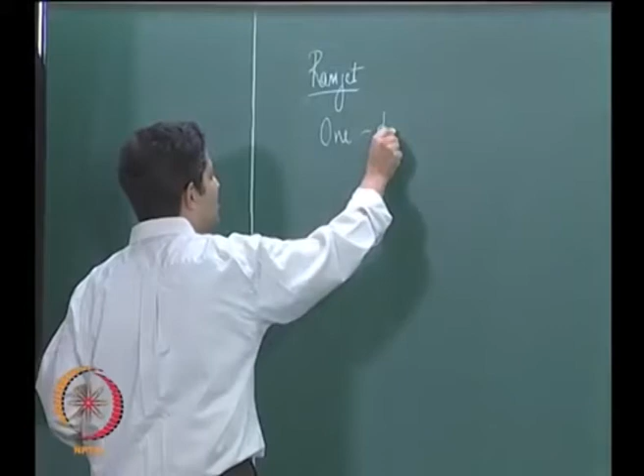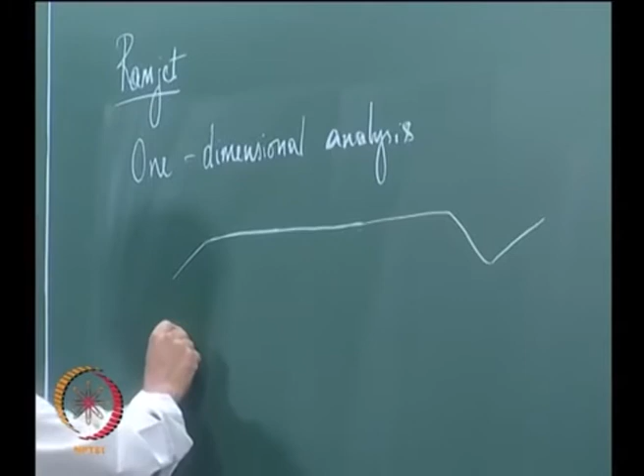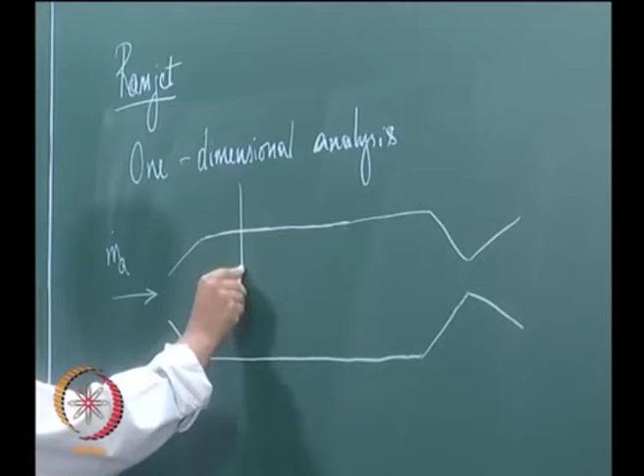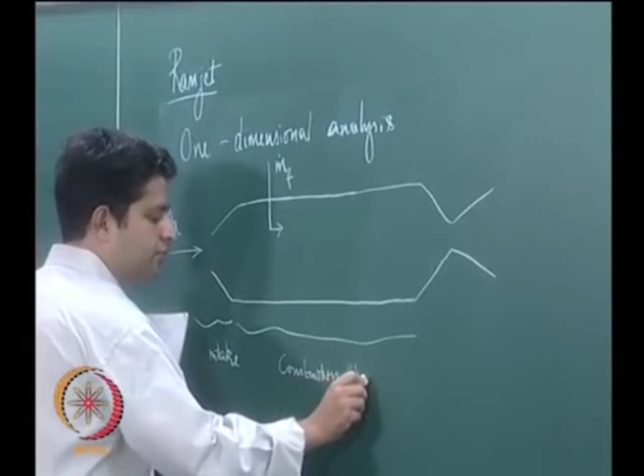That is, the variation is only along the axis of the ramjet. So just to refresh, we have an intake for the ramjet. This is a schematic of a ramjet. You have air coming in from the left, and you have fuel added. This portion is the intake, this is the combustion chamber, and this is the CD nozzle.

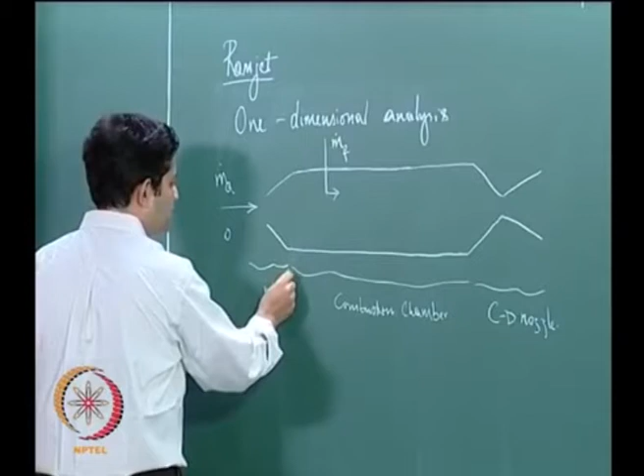Now let me indicate points here. I will call this 0, I will call this 2, 3 and 4. Now correspondingly I will put this information on a TS diagram as to what happens to the cycle on a TS diagram. Let us look at it.

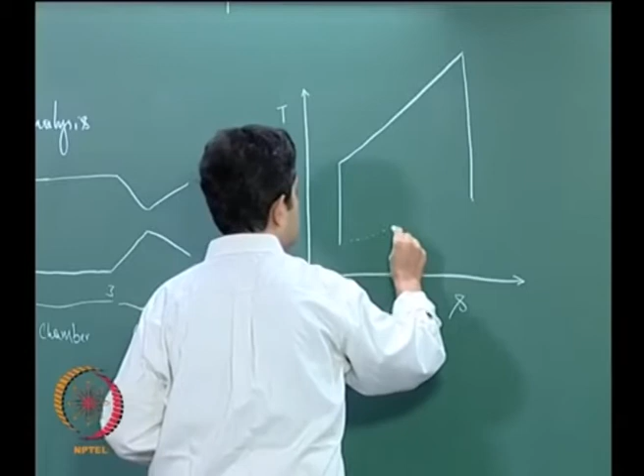This is 0, 0 to 2 is compression, isentropic compression. We are assuming ideal processes here. 0 to 2 is isentropic compression, 2 to 3 is heat addition in the combustion chamber here, and 3 to 4 is expansion through the nozzle. Okay, fine.

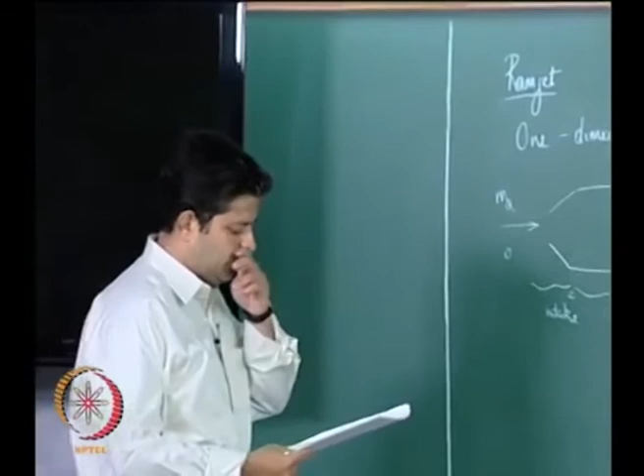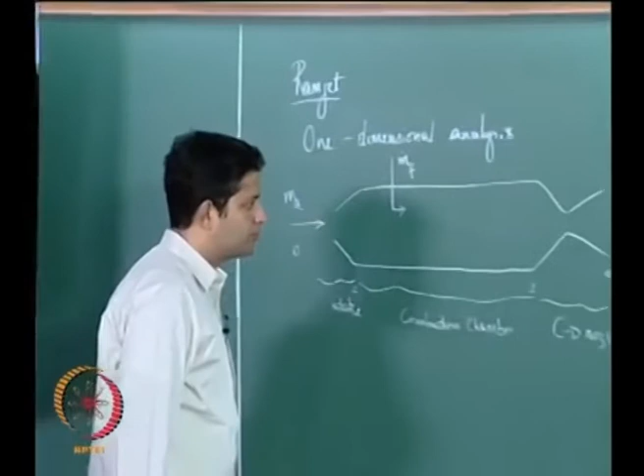Now we had derived some time earlier the thrust equation, and we had seen that for an air breathing system the thrust F is equal to m dot A into, I will call it in terms of the quantity here, V naught, and m dot A into 1 plus f, V4 that is the exit velocity, minus V naught plus the pressure thrust A4 into P4 minus P naught. So this is the exit velocity, this is the entry velocity, and this is the pressure thrust. Typically the pressure thrust part is very small compared to the convective flux thrust.

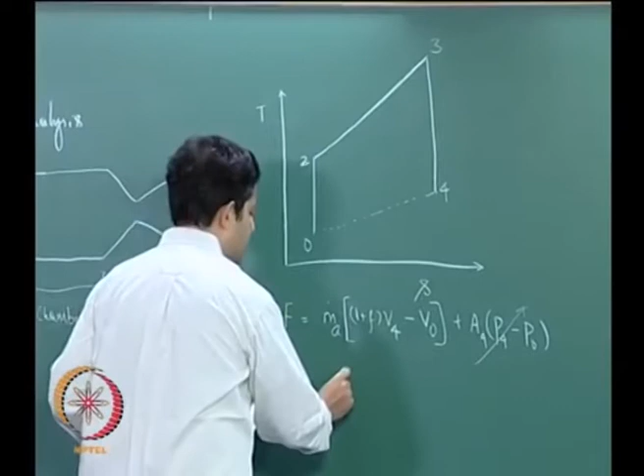So in this analysis we will neglect this part. We will consider that the nozzle is optimal, the flow in the nozzle is optimally expanded. So P4 will be equal to P naught, so this part goes to 0, and essentially we are left with only the convective flux.

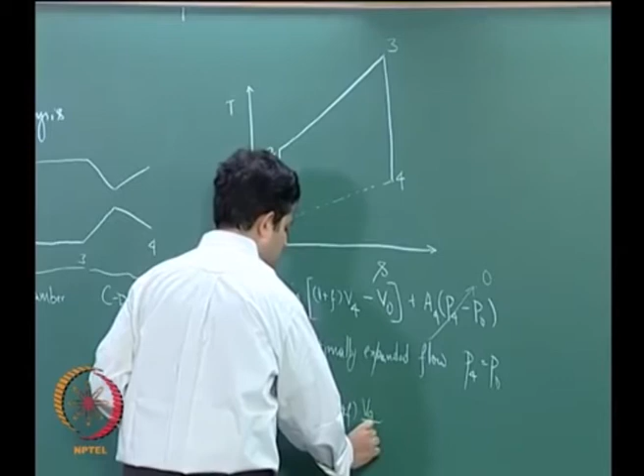Now, I can rewrite this as F is equal to m dot A V naught, okay fine.

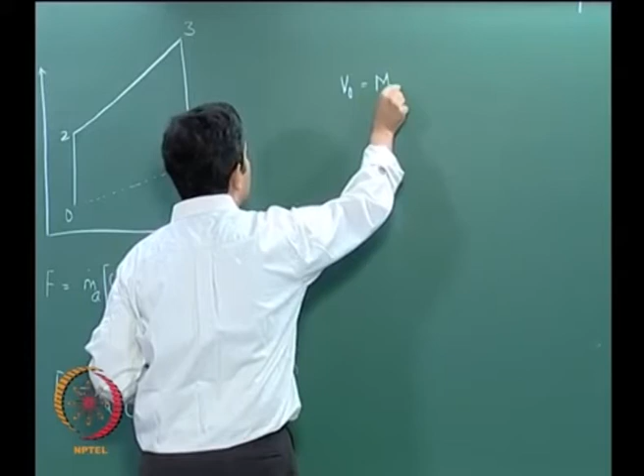Now further I want to simplify it. What we know is that velocities are related to Mach number and speed of sound, so I will use that information. I know V naught is equal to M naught A naught, and V4 is equal to M4 into A4. I also know that A naught is nothing but... and A4 is... okay.

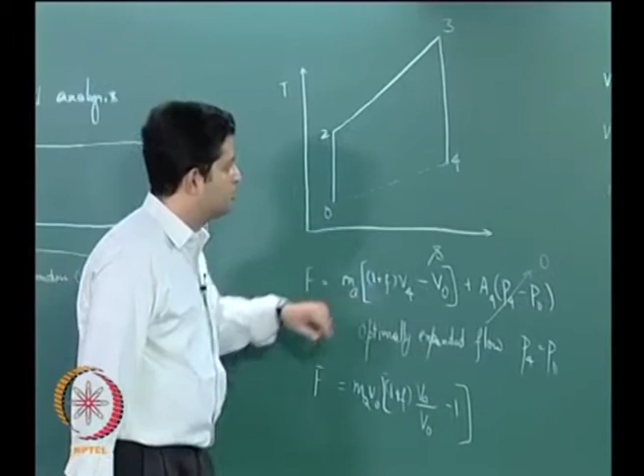So I know the relationship between the velocity in terms of Mach number and then in terms of temperature. Now we will make an assumption here. If you see here, A4 corresponds to the velocity of sound at condition 4. At condition 4, you realize that we have added fuel and burned the fuel, and therefore the composition of the gases at 4 and 0 are not the same. So typically speaking, I should have written different notations for these two, right. But in this analysis, we will assume that as the gases pass through the device, there is no change to either gamma or R.

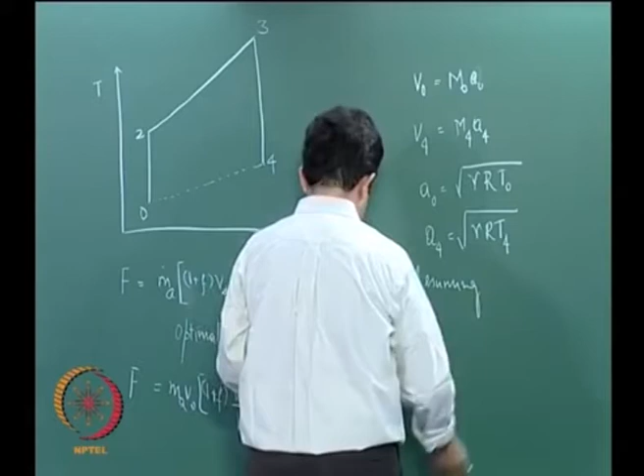So assuming R and gamma to be the same for exhaust gases and ambient air, we can do the further simplification of this.

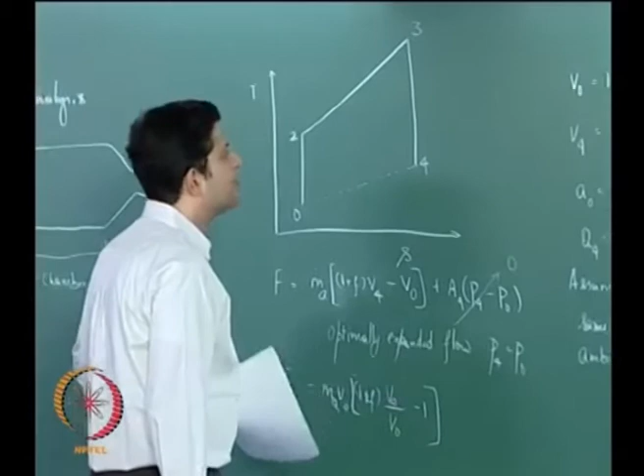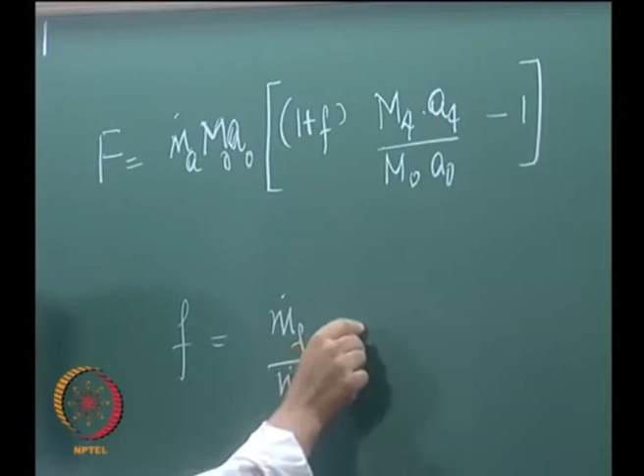So I can now write F is equal to m dot A. I know that V naught is nothing but M naught A naught, and M4. Now if you remember our discussions earlier in the course, in all the air breathing propulsion we said that if kerosene is the fuel or any hydrocarbon is the fuel, then f, the fuel air ratio, that is m dot F by m dot A for stoichiometry is around 1/16-17. So this is pretty much less than 1, so we can neglect f in comparison to 1. So f is very much less than 1. So I can rewrite my equation as F is equal to m dot A, M naught A naught, so this goes to 0. I will get M4 into here. I know that A4 is gamma RT4 and A naught is gamma RT naught.

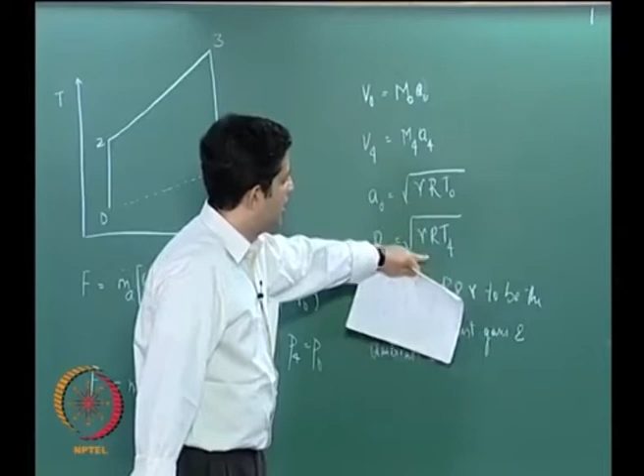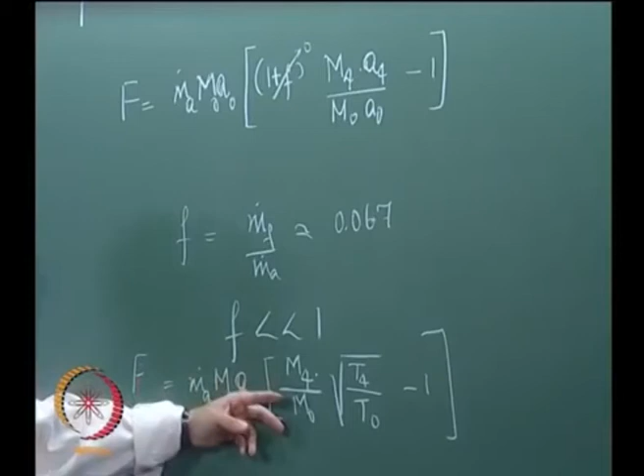What I will do is take out the gamma R part because of this assumption, and I will be left with M4 by M naught into under root of the temperature ratio. So we have been able to express this in terms of ratio of exit to inlet conditions. Now what we will do is what is known as cascading of pressures and temperatures. We will try to cascade from the nozzle side towards the inlet and see what we can get out of this.

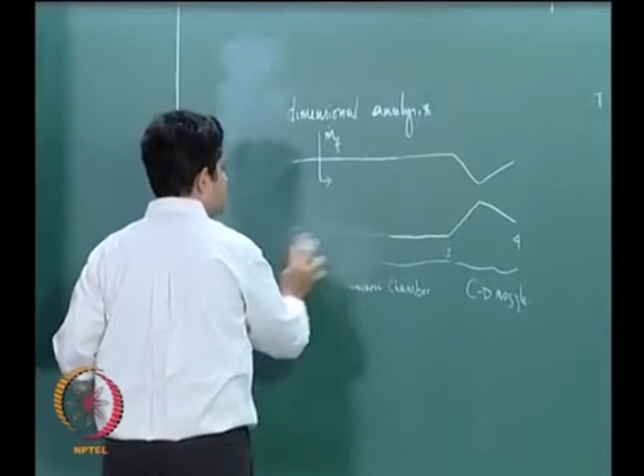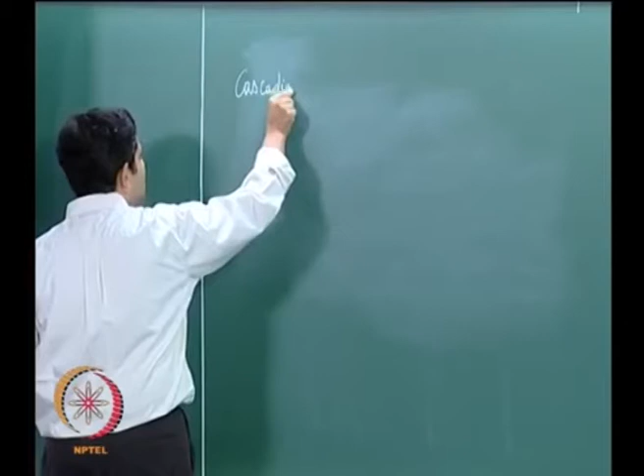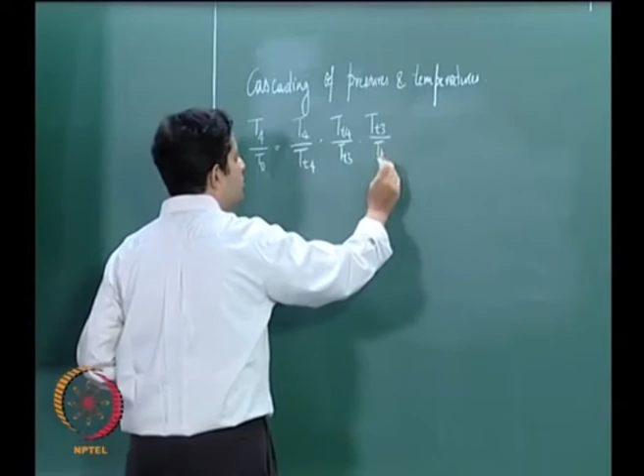We will do cascading of pressures and temperatures and see what we can get out of it. Firstly, let me take T4 by T naught. T4 by T naught, I can write it as T4 by TT4 into TT4 by TT3 into TT3 by TT2 into TT2 by T naught, or I will call this TT naught to TT naught by T naught.

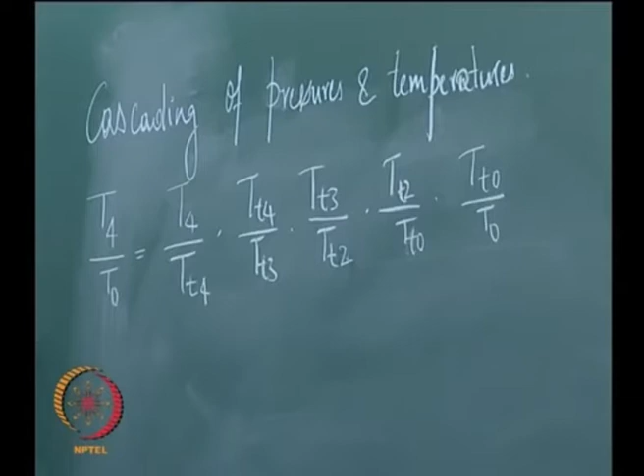The subscript T here indicates total or stagnation conditions. So, what we have done is we have expressed it as a ratio of static to stagnation, and then stagnation of 4 to 3, 3 to 2, 2 to 0, and then stagnation to static. All these will cancel out and you will get T4 by T naught.

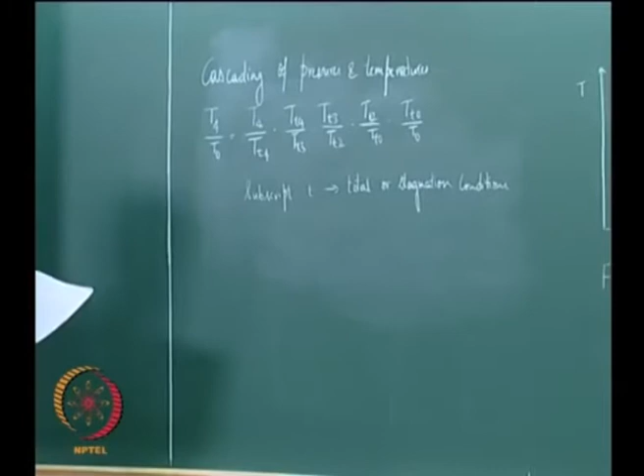So, let us look at what are these values. This is nothing but local static to stagnation condition, which we can express in terms of Mach number.

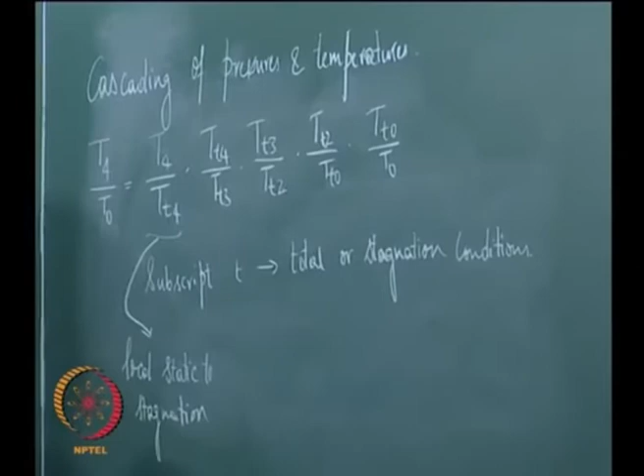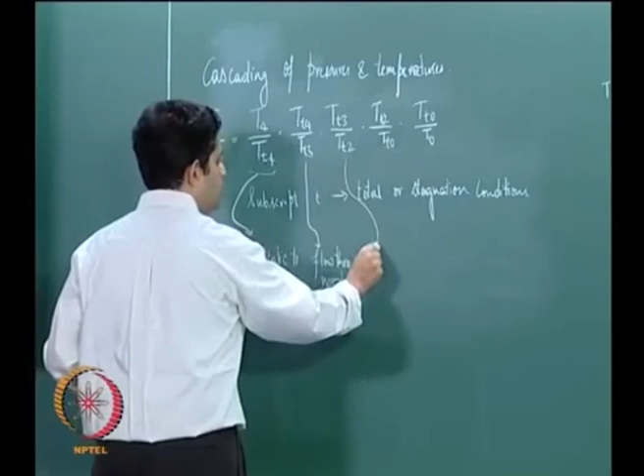What does this represent? Tt4 by Tt3, it represents flow through the nozzle. Similarly, Tt3 by Tt2 represents flow through the combustor. This represents flow through the diffuser or intake, and this again is local static to stagnation.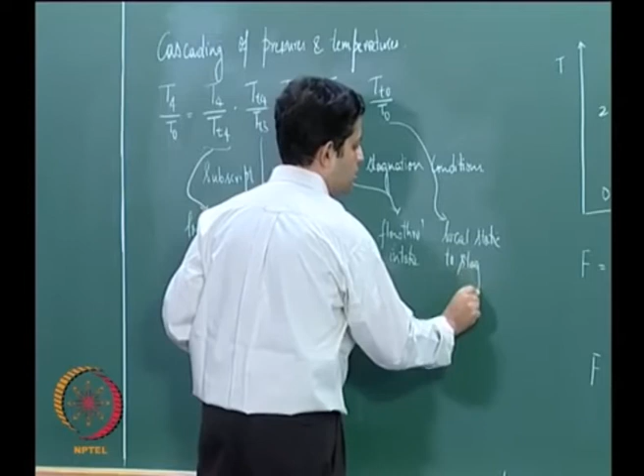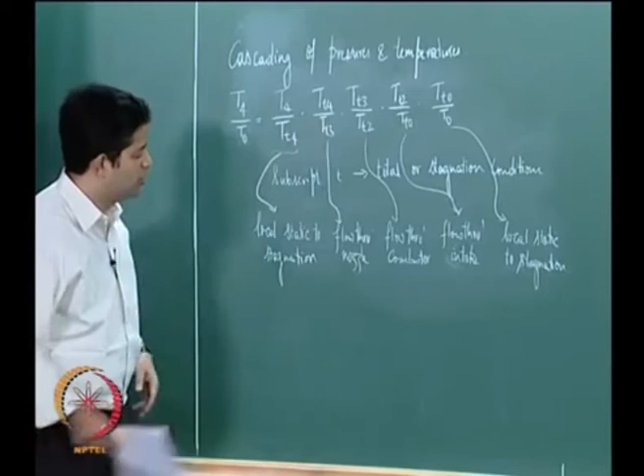Now, for an isentropic flow, what happens to this ratio Tt4 by Tt3? If we assume the flow through the nozzle to be isentropic, then both these temperatures are same, so you get this ratio to be 1. Then again flow through intake, this is also 1.

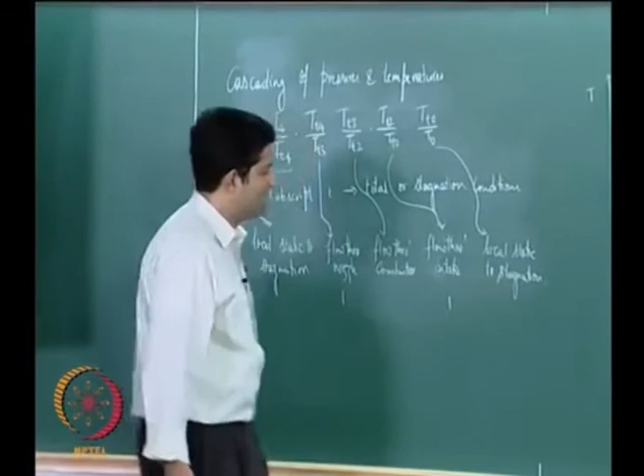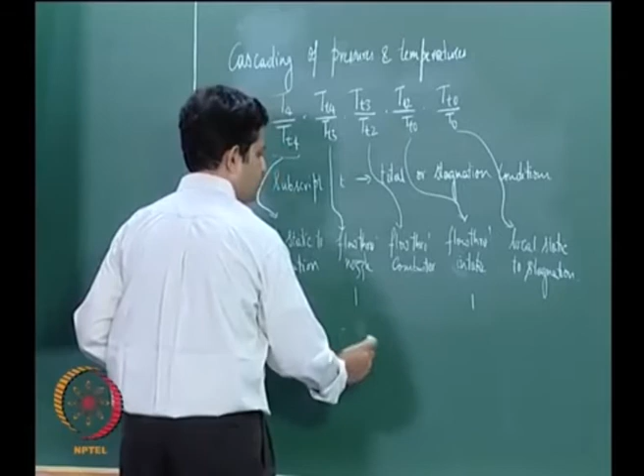You are left with now 3 things: flow through combustor and local static to stagnation. The first and the last one we can express in terms of Mach number. This would be 1 by 1 plus gamma minus 1 by 2 m4 square into 1, and again this would be one plus gamma minus 1 by 2 m naught square. So, lastly we are left with flow through the combustor.

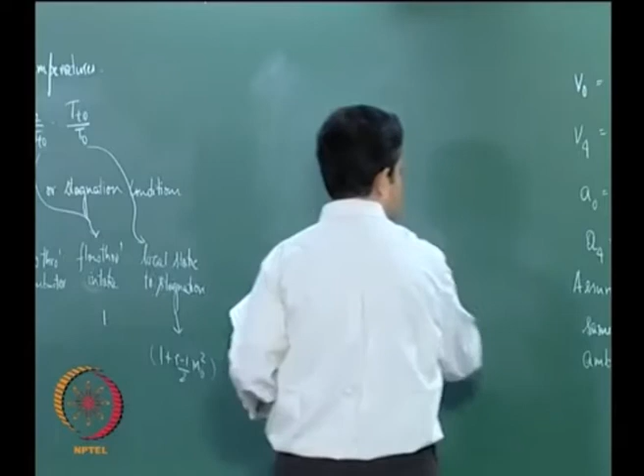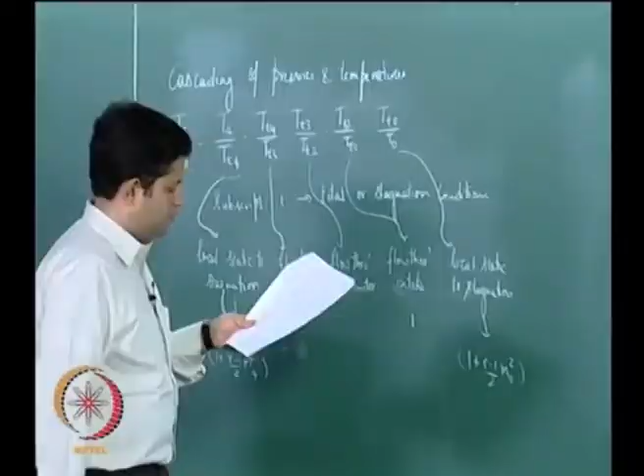Now, let me call this ratio Tt3 by Tt2 as tau b. Now, I can also express this tau b as Tt3 by T naught into T naught by Tt2, fine, T naught cancels out, you get the same thing.

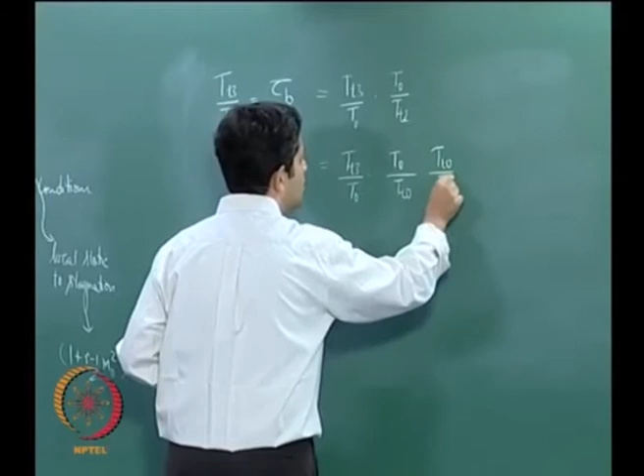This we can express in terms of Mach number, and let me call Tt naught by T naught as theta naught. So, if I call Tt naught by T naught as theta naught, I will get tau b as equal to Tt3 by T naught into 1 by theta naught.

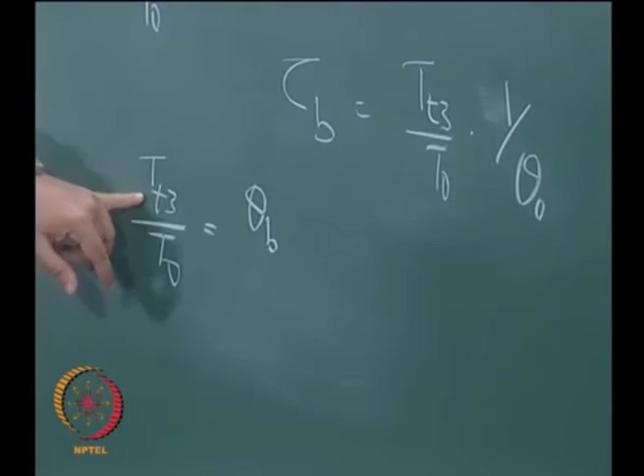I will also define Tt3 by T naught as theta b. This is nothing but the ratio of the exit temperature of the combustor to the ambient temperature. Now, this is under the designer's control, right, so therefore this is a very important parameter, as we will see later on in the discussions. Tt3 is the temperature at the exit of the combustor and T naught is the inlet temperature, so we will call this theta b.

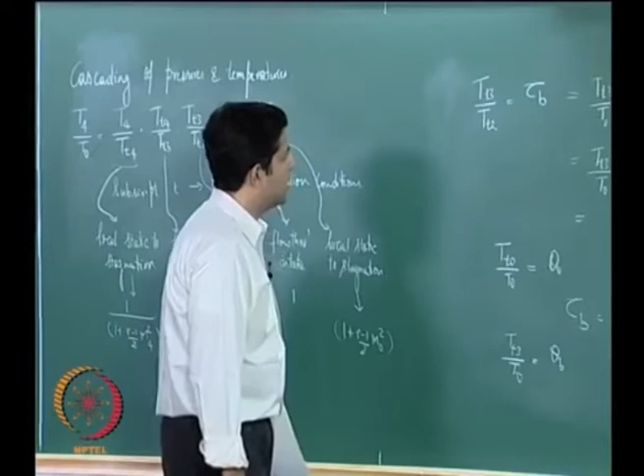So I get tau b as this, which is nothing but theta b by theta naught. So, if I substitute back for this T4 by T naught, all this, I will get the following expression.

Let me put that as 1 by 1 plus gamma minus 1 by 2 m4 square into 1, into, if you see here Tt3 by Tt2 is nothing but tau b, which is nothing but theta b by theta naught, into flow through intake, which is 1, into the last part 1 plus gamma minus 1 by 2 m naught square. I have defined this ratio as theta naught here. So, finally, we get T4 by T naught is equal to theta b by 1 plus gamma minus 1 by 2 m4 square.

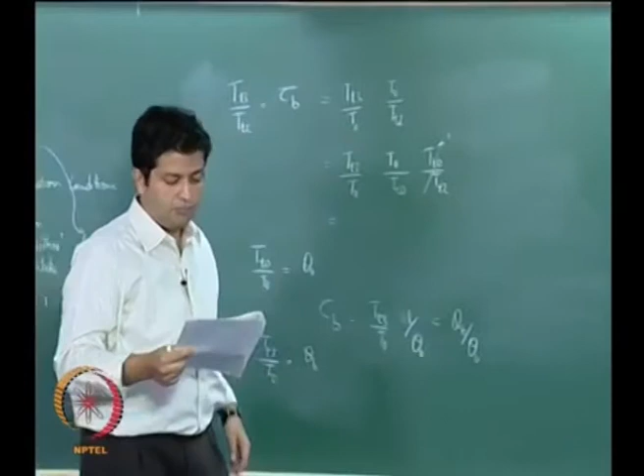Now, we have been able to derive this expression for T4 by T naught by cascading temperatures. Let us now do the same exercise by cascading pressures, to try and find out what is the relationship for Mach numbers.

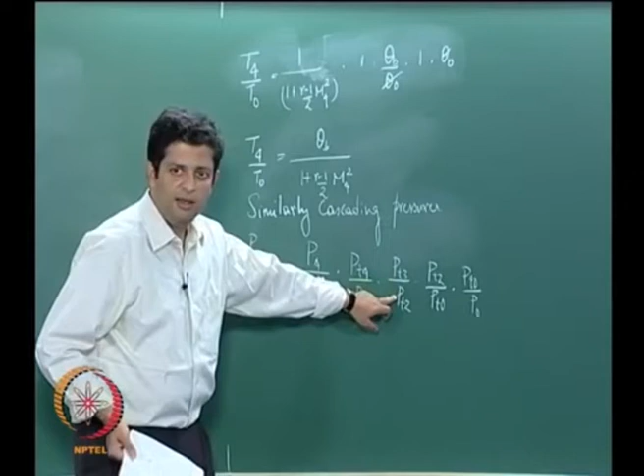This pressure term indicates the efficiency across the nozzle. This indicates the efficiency across the combustor, and this indicates the efficiency across the intake. So I will call these nozzle efficiency eta n, burner efficiency eta B, and lastly diffuser efficiency eta D.

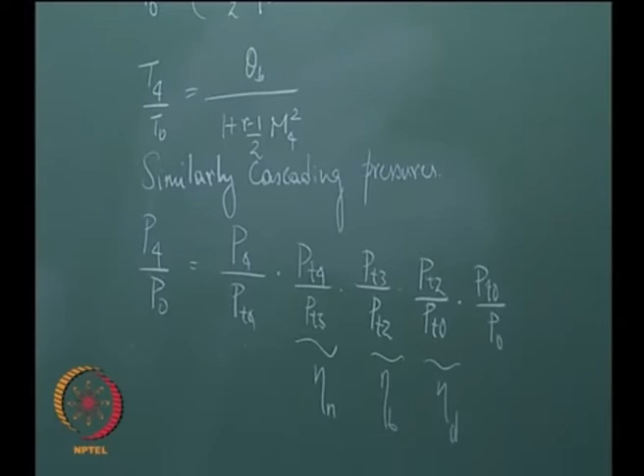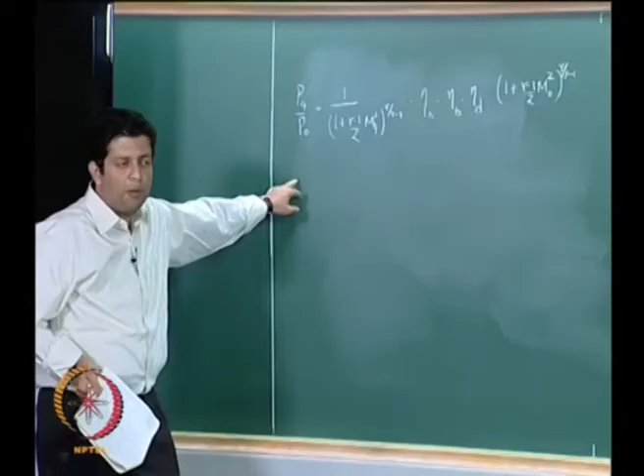So this is the expression that we have. What is P4 by P naught? Remember when we started out we made an assumption saying that P4 by P naught is equal to 1, for optimally expanded flow. So you get 1 plus gamma minus 1 by 2 M4 square. This is the expression that we get by cross multiplying.

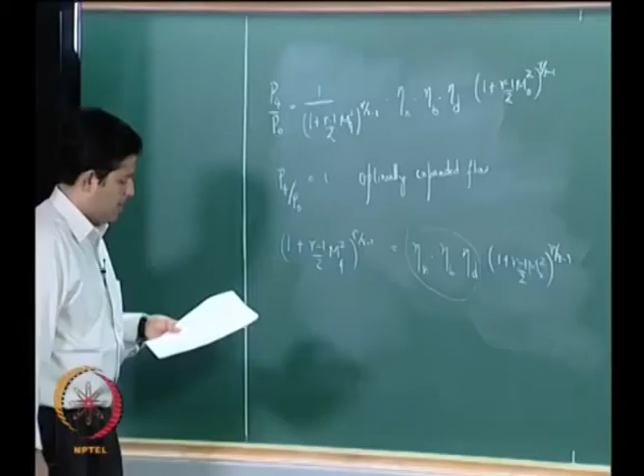Now I will put all these three ratios into one value of eta, and I will express eta as eta n into eta b into eta d, to the power of gamma minus 1 by gamma. If I do it this way, then when I plug in for this, it will all be a relation of gamma by gamma minus 1, so I can remove the powers and look at what we have here.

So we get finally 1 plus gamma minus 1 by 2 M4 square must be equal to eta into... the powers get cancelled out, so you are left with this equation.

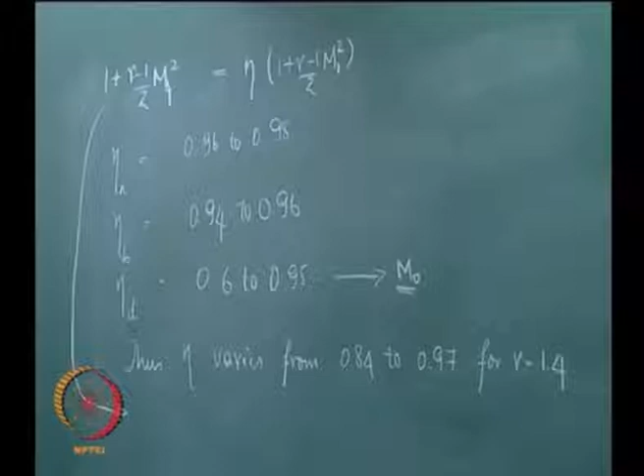Now coming back to this equation here, this was our relationship that we were trying to find in terms of Mach numbers. What is this term here? This is nothing but theta naught, right. So we get 1 plus gamma minus 1 by 2, M naught square, is nothing but theta naught.

So from here you get M naught is equal to square root of 2 by gamma minus 1 times theta naught minus 1, and similarly if you put eta theta naught here, you can get an expression for M4.

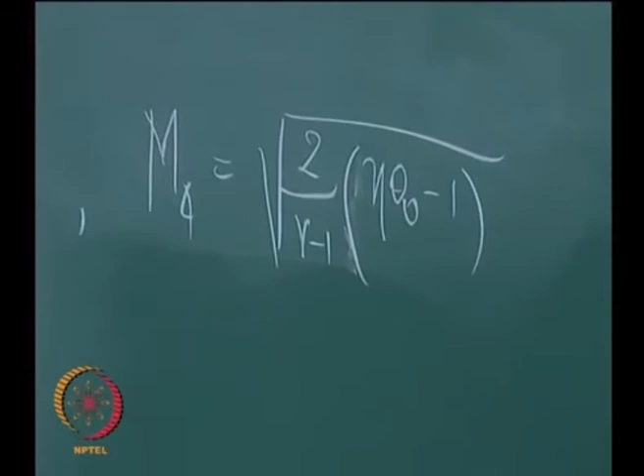So now we have the relationship for M4 by M naught and T4 by T naught. In our earlier thrust relationship, we were searching for a relationship for T4 by T naught and M4 by M naught. We have got both of them. Let us plug it in and see what happens.

So our relationship: M4 by M naught is equal to square root of eta theta naught minus 1, divided by theta naught minus 1, and similarly T4 by T naught was theta b over 1 plus...

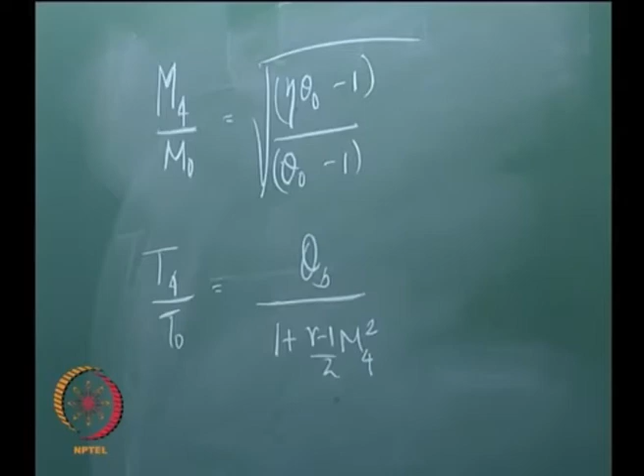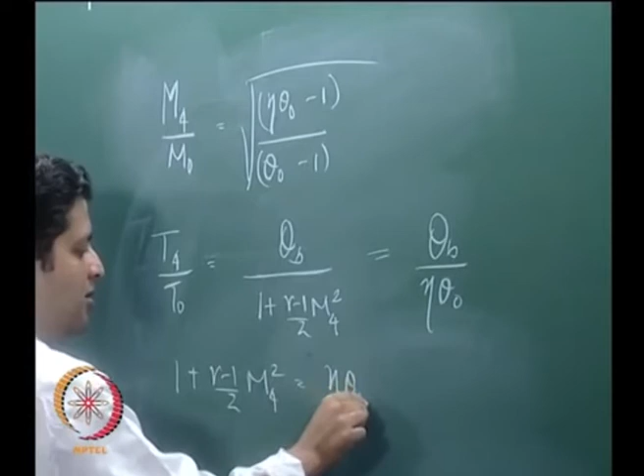What is this term? This is nothing but this term here, right, so it is nothing but theta naught. So you get theta b is equal to... T4 by T naught is equal to theta b by eta theta naught. This is because we have shown that 1 plus gamma minus 1 by 2, M4 square, is nothing but eta theta naught. So we have both the ratios that we were looking for.

So our thrust equation becomes F is equal to m dot a naught, M naught... we had M4 by M naught, that is nothing but square root of theta b. I will firstly put T4 by T naught, eta theta naught, into... This is the expression that we get for thrust in a ramjet.

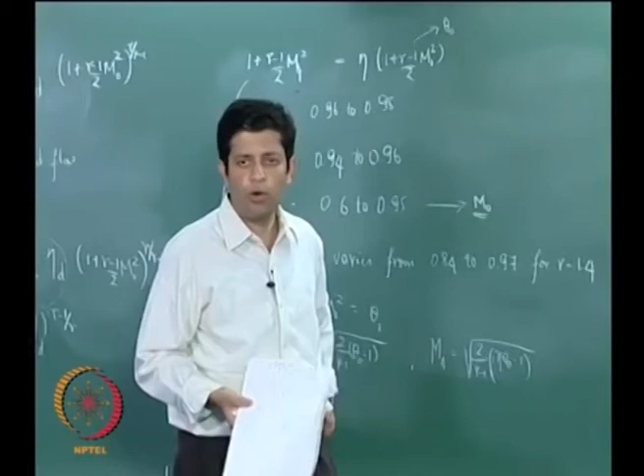Now we like to have non-dimensional numbers. We can easily see that we can non-dimensionalize this thrust if we divide by m dot a naught throughout. Mach number is a non-dimensional value, and all the other things, theta b, eta and theta naught, are also non-dimensional values. So I get F by...

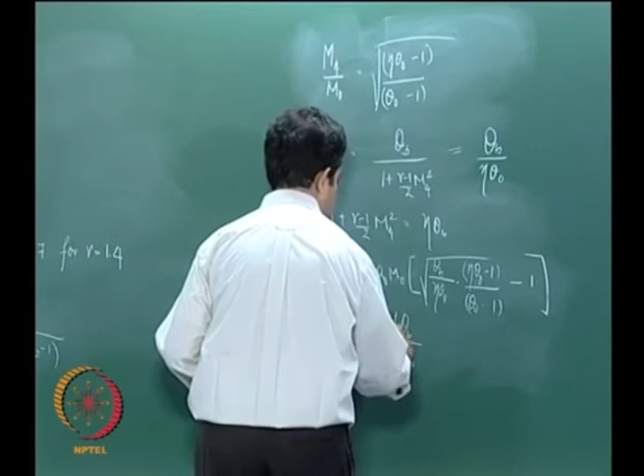So this is the expression for non-dimensional thrust.

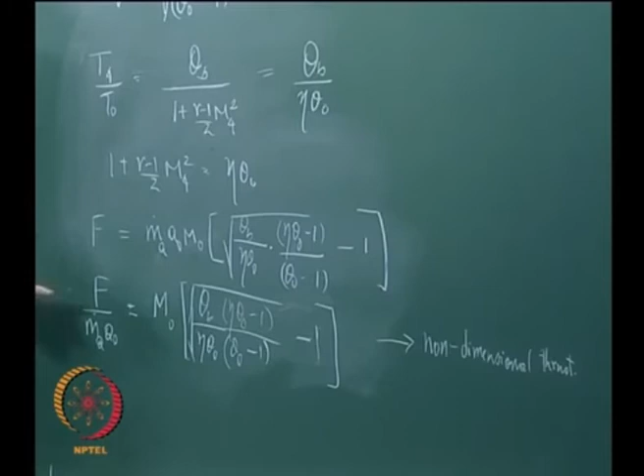Now we have found the expression for non-dimensional thrust in terms of theta b, which is nothing but the ratio of combustor exit temperature to ambient temperature, and a function of Mach number and efficiencies. Theta naught is a function of Mach number, eta is efficiency, and M naught is again Mach number itself. So the only input parameters under our control are theta b and the flight Mach number. The rest is system determined, that is, eta or the efficiency is system determined.

Now we have been able to do this. We also need another parameter, right. What is the other parameter of interest to us? Specific fuel consumption. In this case, we look at ISP, which is 1 over specific fuel consumption.

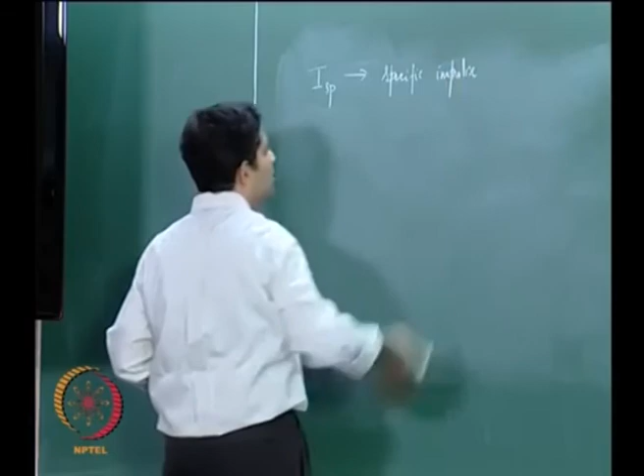This is nothing but specific impulse, and it is 1 over SFC. We define ISP as thrust per unit mass flow rate of fuel.

So, what we have got is an expression for F by m dot A, and now I have a definition for ISP like this. We have spent considerable effort deriving that expression, so we have to take a little more benefit out of it. We will multiply this suitably and find out if we can use that expression.

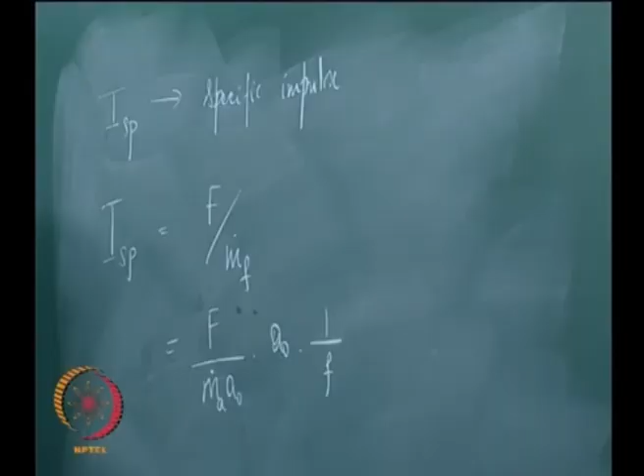I can write this as F by m dot A into A naught into A naught divided by F, where F is nothing but the fuel air ratio, m dot F by m dot A. So if you put m dot F by m dot A here, this m dot A and this m dot A cancels out, and A naught and A naught cancel out, and you get F by m dot F. So we have been able to get this expression that we derived here.

So if we want ISP now, the only parameter that we need to derive an expression for is F here. We will do that right now.

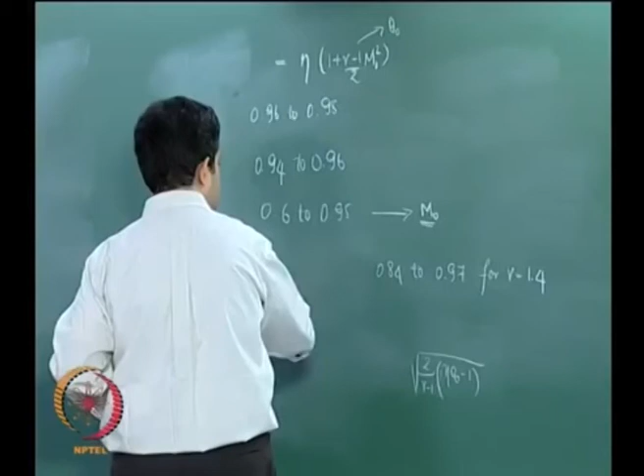We will derive an expression for F by looking at the energy balance across the combustor. What you are putting in is chemical energy associated with the fuel, given by m dot F, the mass flow rate of fuel, into the calorific value of the fuel, Q.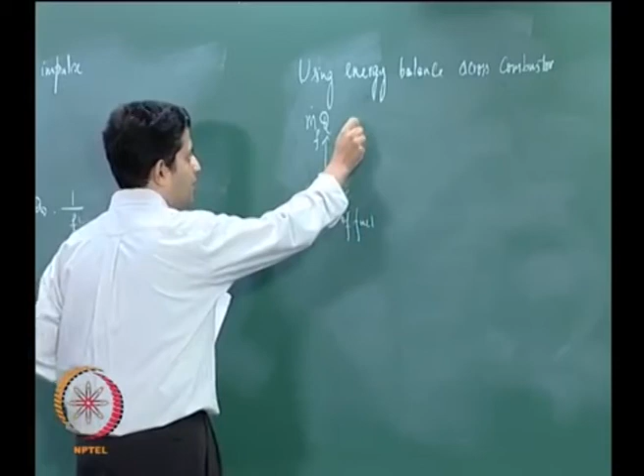What must this be equal to? The sensible enthalpy rise across the combustor. That is given by m dot A into... the 1 plus F here indicates that you are looking at the combined mass flow rate of fuel and air when you are looking at conditions at station 3.

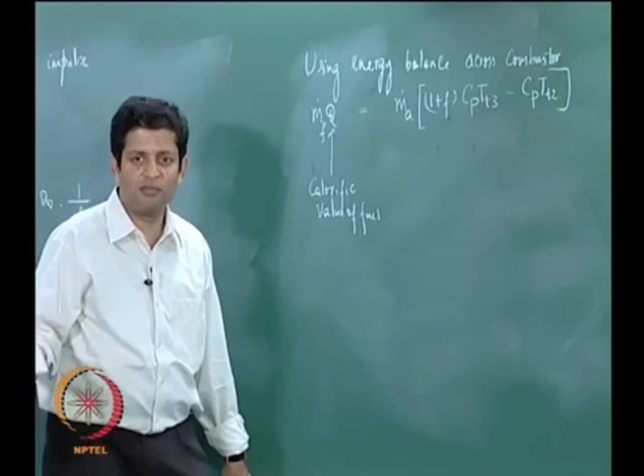Now, again, this is a little weird - you are trying to get an expression for F, and what we are trying to do is see if we can eliminate this, just to make our algebra a little cleaner. F, you can compare it with 1 - always in engineering approximations you tend to compare it with a known value, and then if it is very small compared to that value you can neglect it. You cannot neglect it arbitrarily, but you have to make a comparison with some other quantity. So if you compare F with respect to 1, we have seen that F is very much smaller than 1.

So you can neglect this part here, and this goes out. We get m dot F Q is equal to... Cp is common for both the burnt gases as well as the incoming air, so I can take it out.

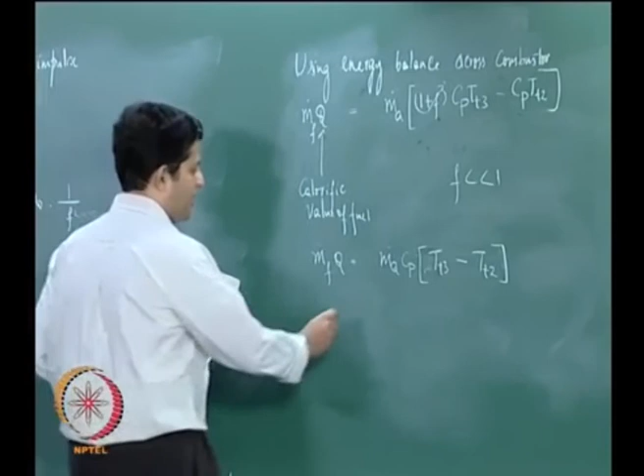Now I need to divide both these by T naught. So I can write this as m dot A Cp T naught... I have divided and multiplied by T naught.

So what is Tt3 by T naught? When we derived the expression for F by m dot A, what is this expression? This is nothing but theta b. And what is this? Tt2 by T naught is nothing but Tt2 by Tt naught into Tt naught by T naught.

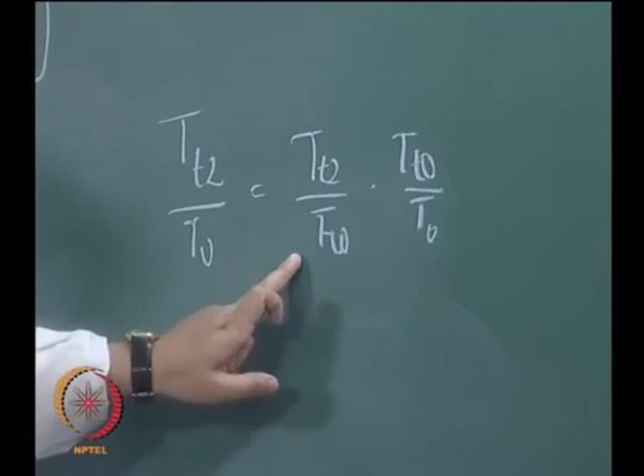What is this ratio? This is flow through the intake, so this is 1, and this - what is this? Theta naught. So if you substitute back in here, you will get m dot A Cp T naught into theta b minus theta naught.

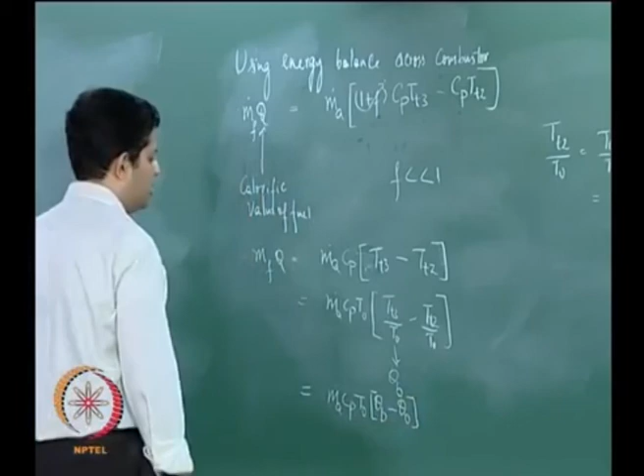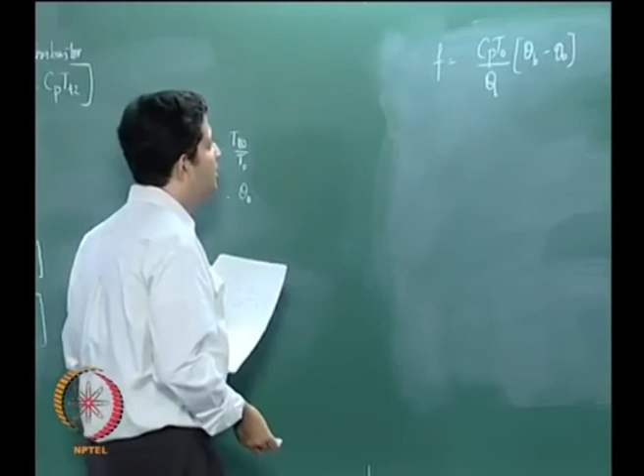So finally we can get an expression for F by combining these two. We can write F is equal to Cp T naught by Q into theta b minus theta naught, and therefore our expression for ISP...

You see this expression for ISP that I have - if I divide the ISP by A naught, I get a non-dimensional quantity. What is the unit of ISP?

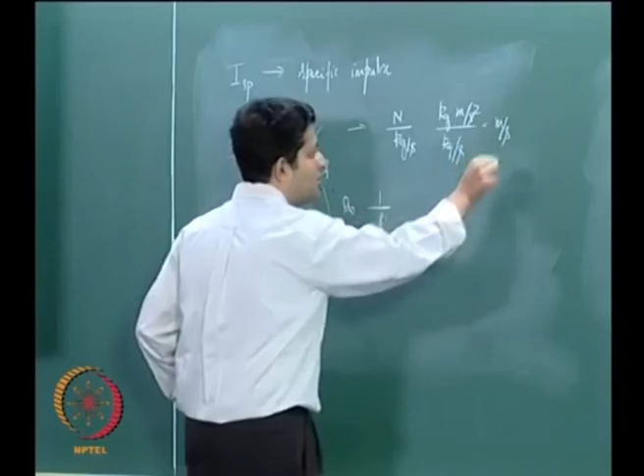ISP's unit is what? Newton per kg per second. What is Newton? Newton is kg meter per second squared, so you get kg meter per second. So what you will get is meter per second. If you simplify further, you will get the ISP unit as meter per second. A naught is nothing but the speed of sound, which is also in meters per second. So you will get a non-dimensional quantity if you divide it by A naught.